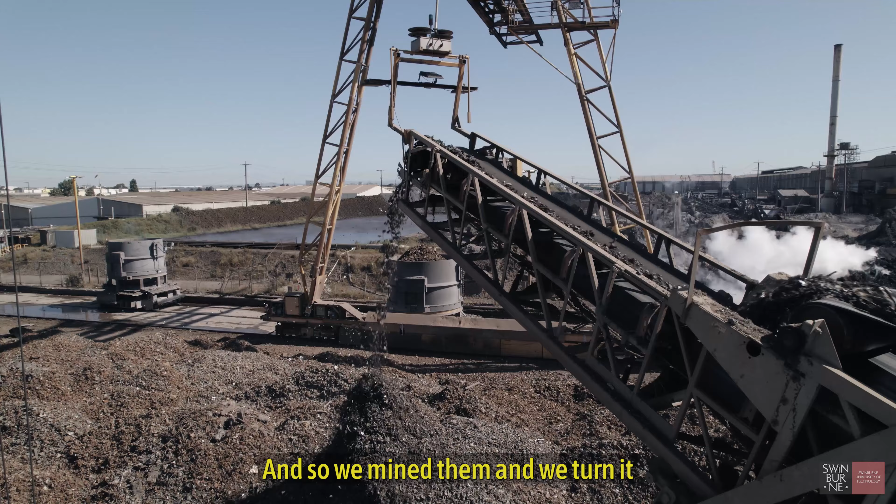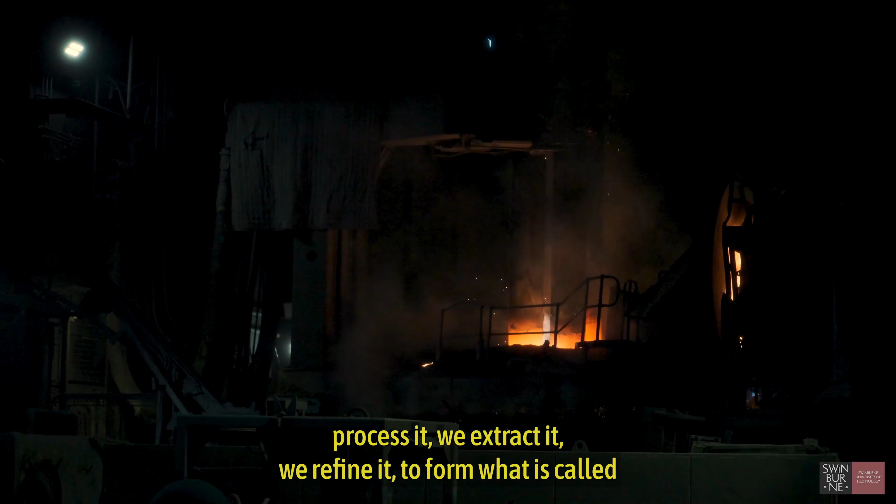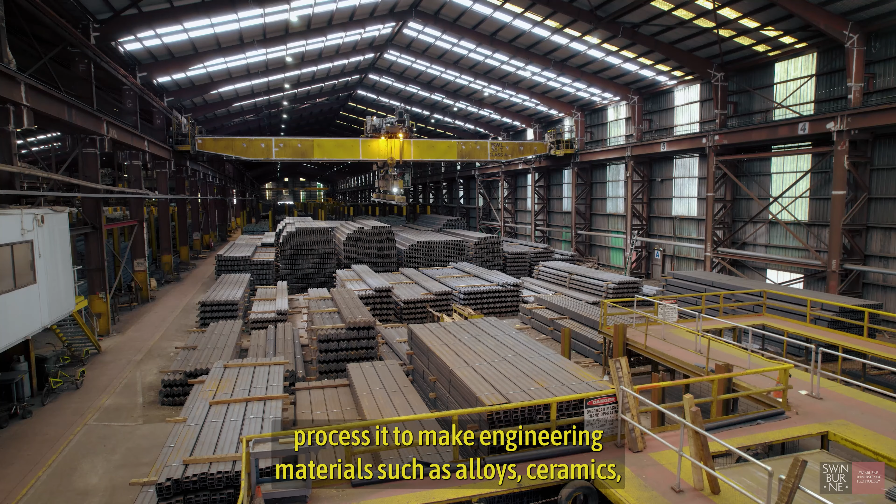So when we talk about green metal processing and recycling, ultimately we use our resources from Earth. So we start with something from underground, we mine them and turn it into what is called raw materials, such as ores, sand, rocks, wood, plants, and then we further process it, extract it, refine it to form what is called basic materials, such as metals, chemicals, paper, cement, and fibers. We further process it to make engineering materials such as alloys, ceramics, plastics, concrete, and so on. And then we also further process it to make into products, and then we use that product.

And of course, we use the products, and then at the end of the useful life of the product, we usually turn it back into the underground. So we landfill them or we burn them, right? So this is called the material cycle.

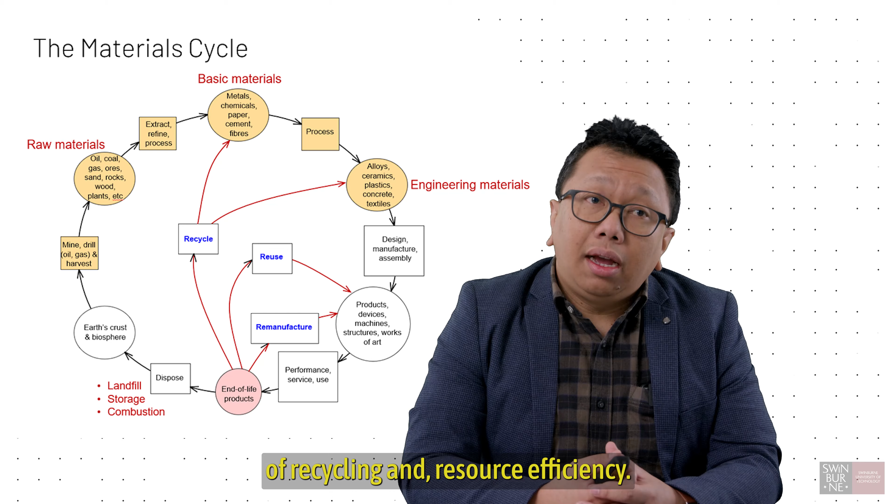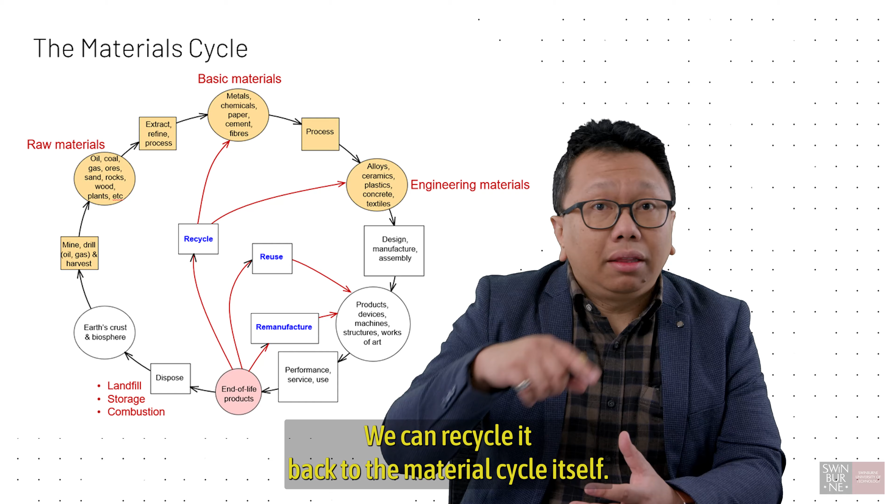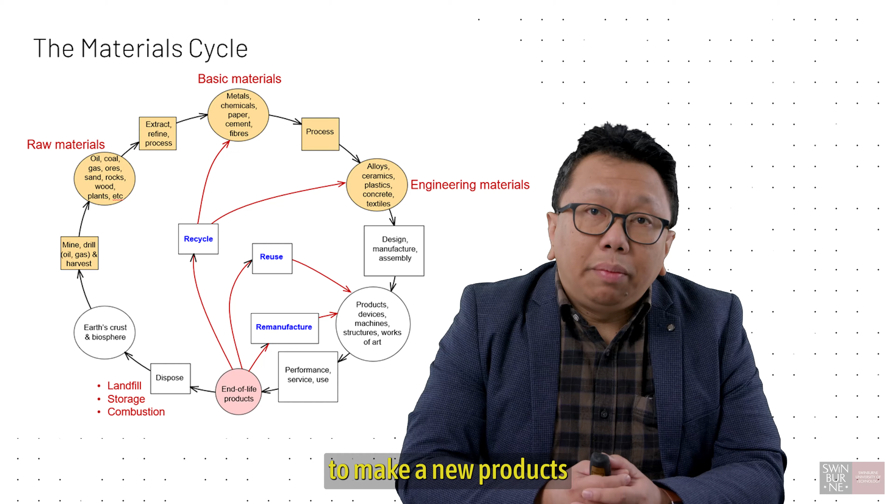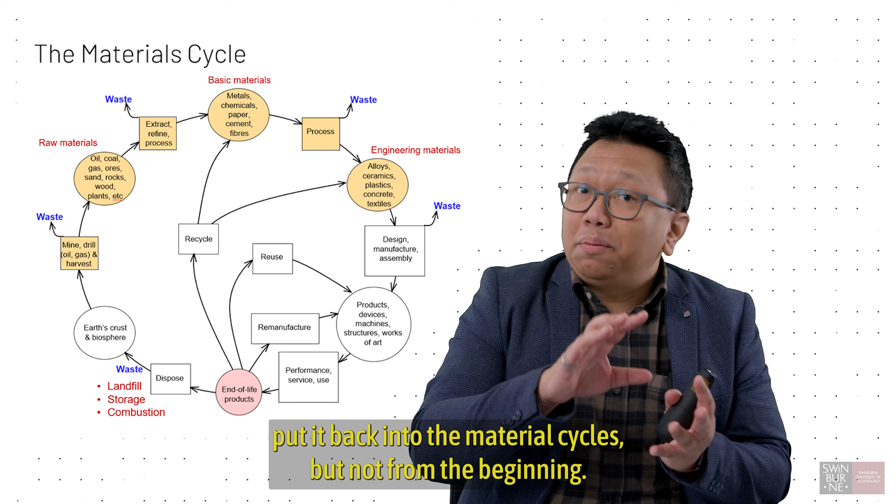In the context of recycling and resource efficiency, instead of putting things back underground, we actually try to reuse this and utilize this in a number of ways. We can recycle it back to the material cycle itself, for example, to make basic materials again. We can reuse it, part of the product, to make new products and also do remanufacturing of new product. So we turn these materials and put it back into the material cycles, but not from the beginning. For example, we use end-of-life products and take the metals, and then we recover the valuable metals from it.

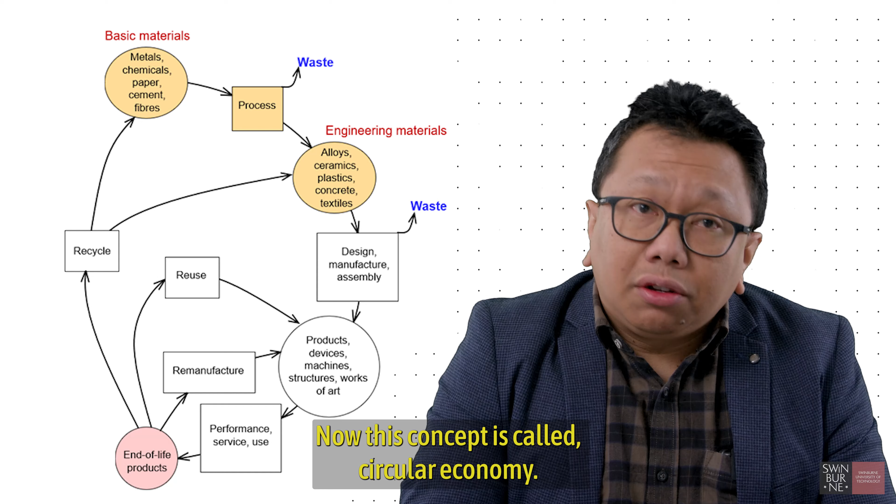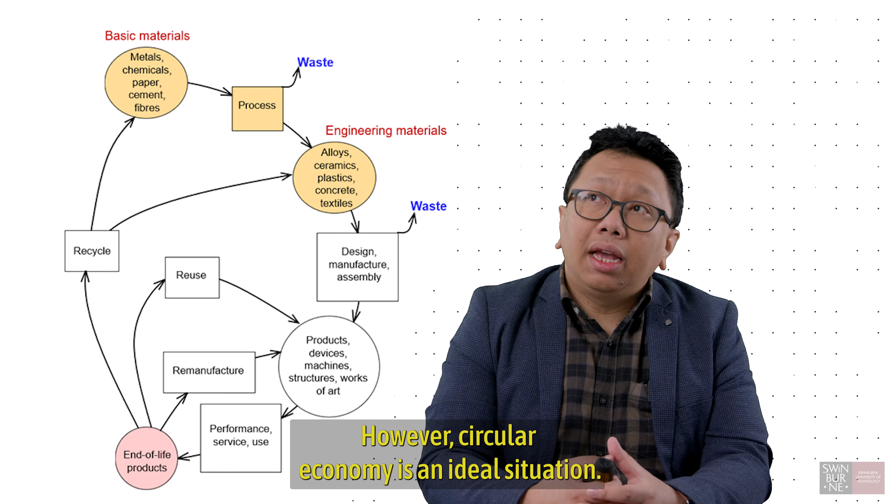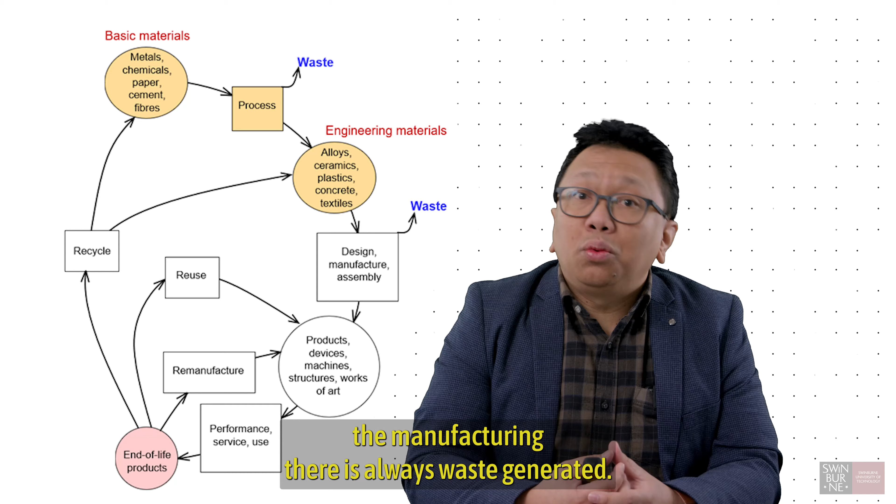Now, this concept is called circular economy. It is an economic system that aims at eliminating waste and the continual use of resources. However, circular economy is an ideal situation. It is an aspiration, right? We cannot really achieve 100% circular economy because actually, in every process, including recycling, remanufacturing, there's always waste generated. And from the thermodynamic perspective, there's a limit where we cannot reuse these materials anymore.

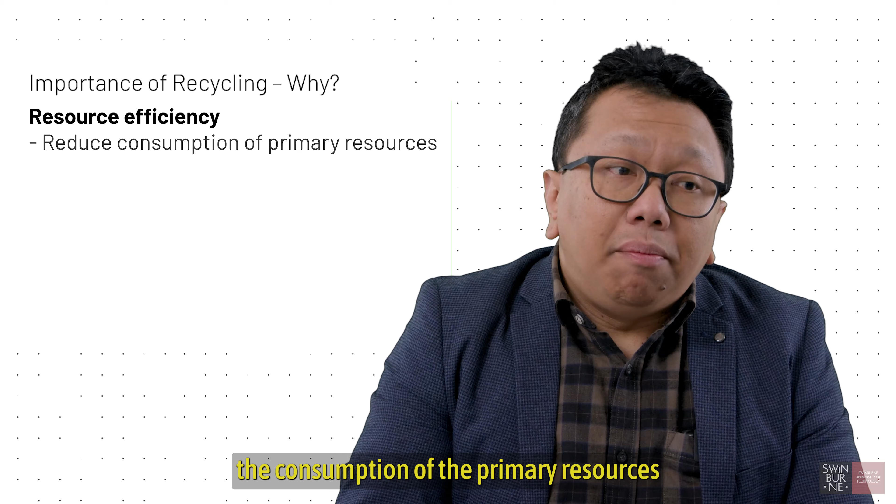So in the context of what we're talking about, it is clear that recycling is vital. So now let's talk about that in more detail. Why actually is recycling important? First of all, it actually reduces the consumption of the primary resources and also reduces the waste associated with processing these primary resources. Usually primary resources are quite complex, and also have quite a long process route. So if we reduce that, we also reduce the waste associated with the processing of them.

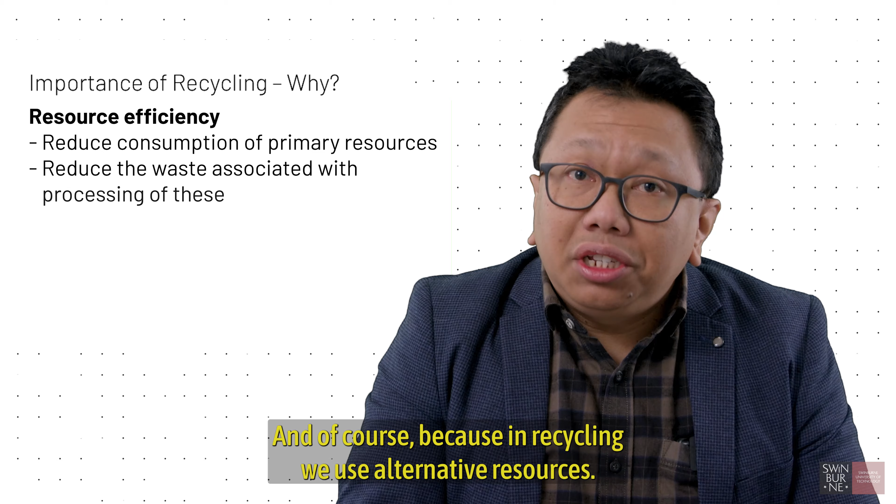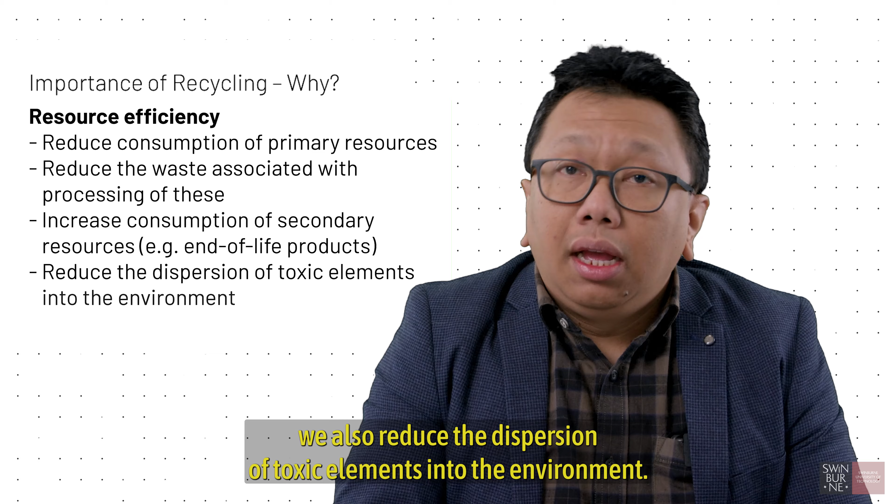And of course, because in recycling we use alternative resources, it means that we increase the consumption of secondary resources such as end-of-life products, byproduct from industries, and other waste from our daily life. In doing more recycling, we also reduce the dispersion of toxic elements into the environment, and of course, we also reduce the space for landfilling as well.

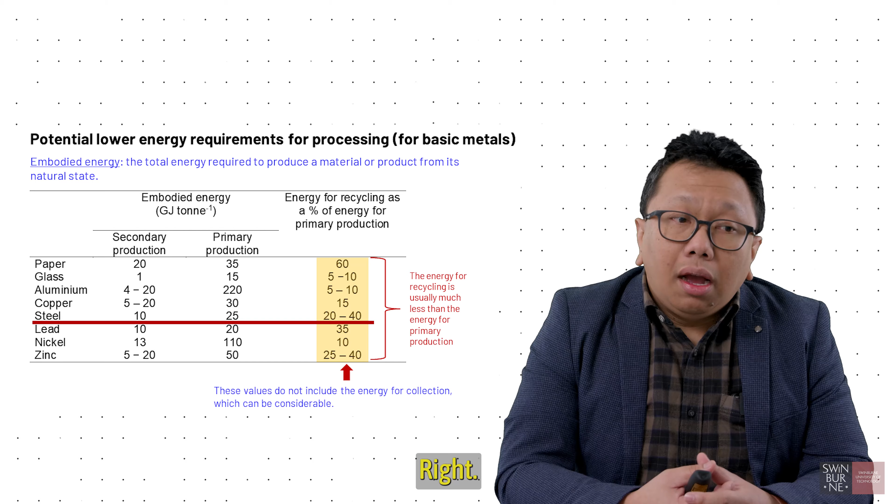And if we look at this one here, let's look at steel. If you want to produce steel, the energy required to make steel per ton of steel is about 25 gigajoules per ton if we use primary resources. However, if we use secondary resources, if we recycle steel, we only need about 10 gigajoules per ton. So that is actually a reduction of energy to 20 to 40%. And the same thing for other metals as well, such as aluminum. We can actually reduce the energy requirement to 5 to 10% if we use secondary resources.

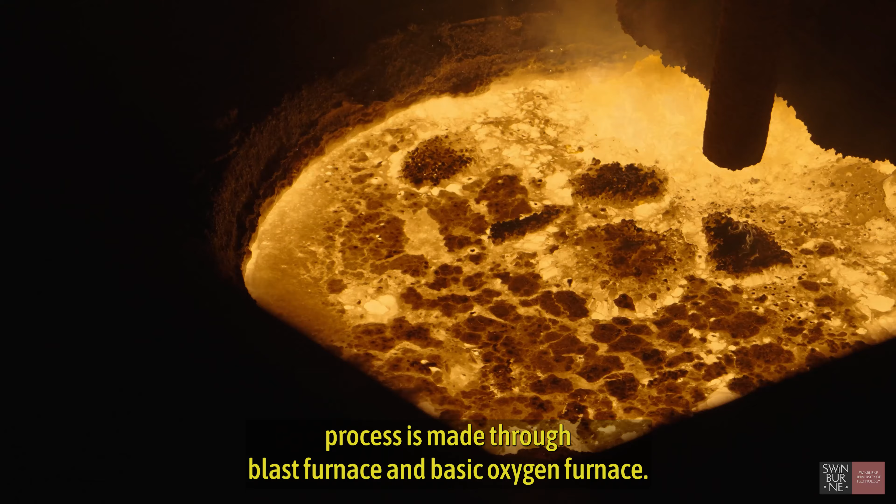Steel contributes to more than 7% of greenhouse emissions. So now in Australia, around 75% of steel processing is made through blast furnace and basic oxygen furnace. Then it's only 25% from EAF, and we know that using EAF is based on scrap. So which means that we need to know how much scrap we have in Australia, and also the quality of the scrap in Australia.

So InfraBuild is an electric arc furnace based steelmaker. We have two electric arc furnaces, one in Laverton in Melbourne and one in Rooty Hill in Sydney. They use steel or scrap steel as the ferrous source, as the source of steel that goes into it.

So we're very different from a blast furnace manufacturer, and because of that we naturally have an advantage because we're a lower emissions emitting process in terms of steel making.

We very much understand that there are 3 major energy inputs that contribute to our emissions. The main one is the electricity we use to make the steel that comes out of the electric arc furnace process. The second is our use of natural gas, and the third is our use of coke, which comes from coal dug out of the ground.

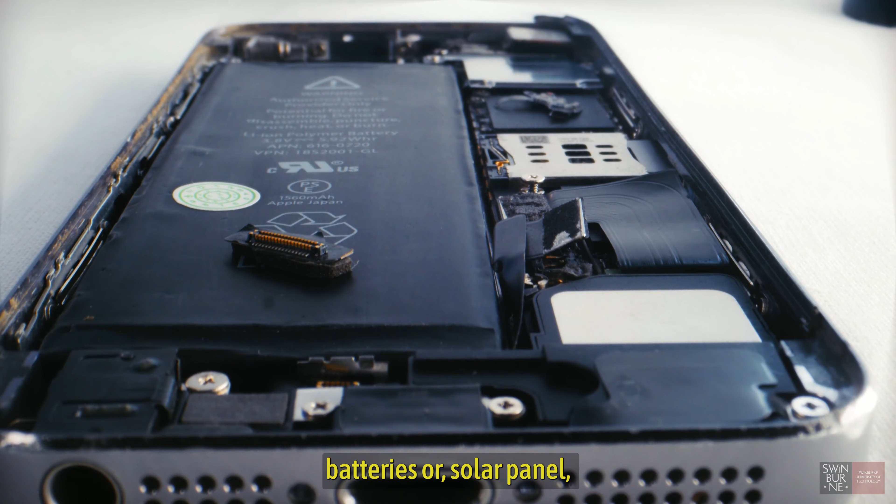The other reason why recycling is important, as I mentioned earlier, is that these secondary resources have some value, right? Some contain valuable metals. For example, mobile phones, batteries, solar panels, or end-of-life magnets. We generally call this e-waste. It actually contains a lot of valuable metals, and the concentration of valuable metals there is actually higher compared to the concentration from primary ores.

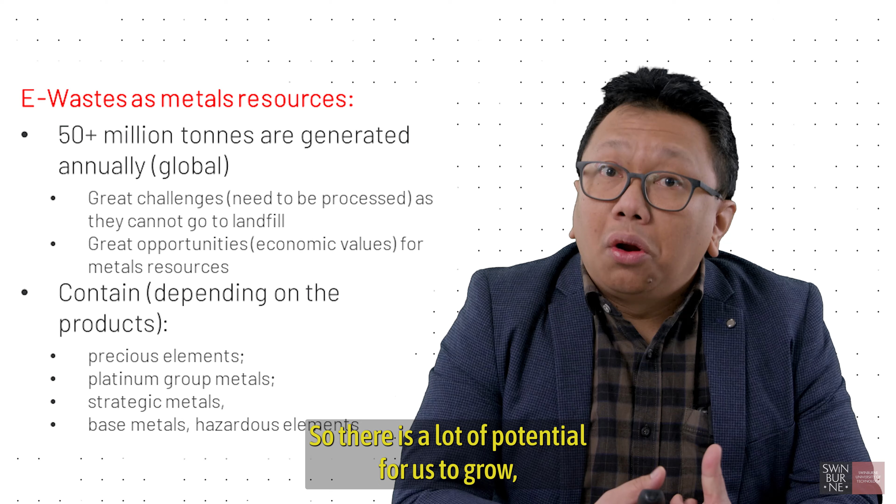So it only makes sense for us to also utilize these resources and do more recycling. When we're talking about e-waste, it is actually an opportunity, but also a challenge. Globally we generate about 50 million tons of e-waste every year, and only about 30% is actually recovered or processed. So there's a lot of potential for us to grow and recycle these materials and get the value from this.

Just to illustrate, if we're talking about a gold ring on my finger, it contains about 2 grams of gold. These 2 grams of gold can actually be obtained from about 15 kilograms of mobile phone waste. But if you look at the primary source, the gold ore itself has a low concentration of gold. The same amount of gold, usually we can only get from about 500 kilograms to 1 ton of primary ores.

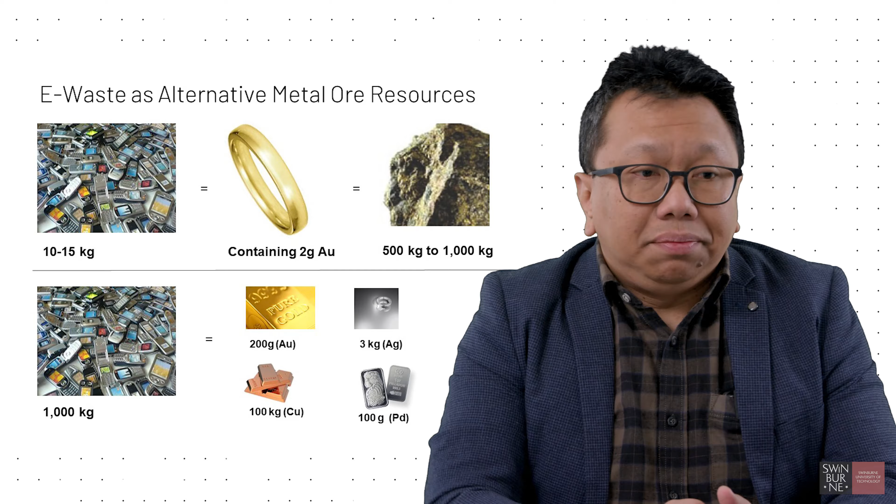So again, it is showing the high value and high concentration of these selected valuable metals in secondary resources. Another illustration: if we talk about mobile phones, looking at the share of weight in the components and elements, we'll find that 56% of a mobile phone consists of plastics. And there's only a total of a few thousand ppm of gold, silver, palladium, and other exotic metals.

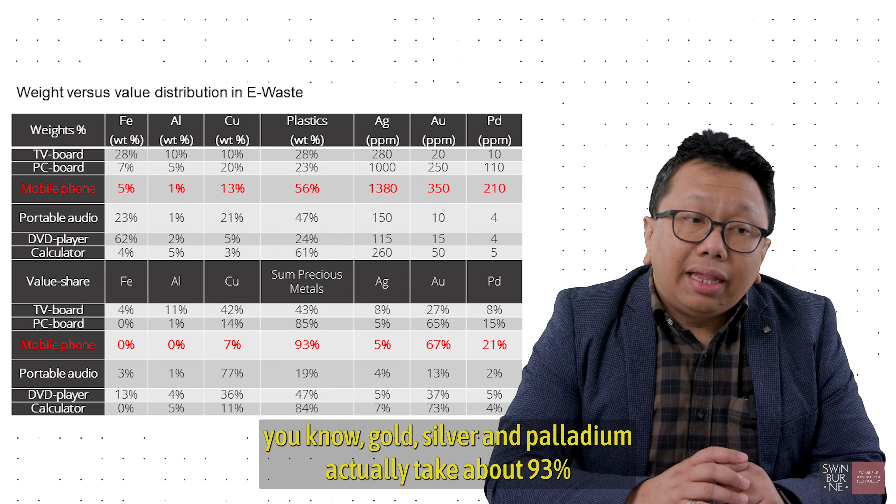But if we look at the value, those gold, silver, and palladium actually take about 93% of the value share of metals in that mobile phone.

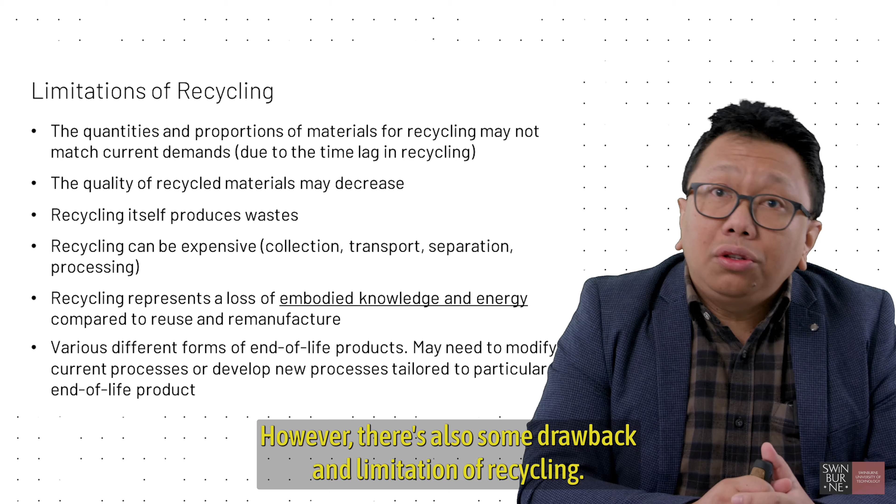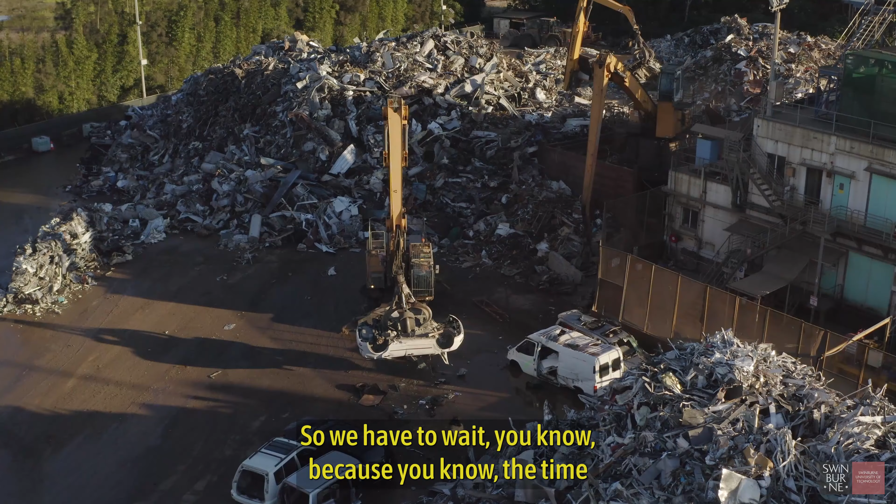So we talk about a lot of good things about recycling. However, there's also some drawbacks and limitations of recycling. For example, the quantities and proportion of materials for recycling may not match the current demand, so we have to wait, because the timing doesn't match with the production of the resources itself and the production of new metals. The quality of recycled materials may also decrease — that's another limitation.

Recycling itself produces waste. This comes back to my earlier comment regarding circular economy — we cannot really achieve 100% circular economy.

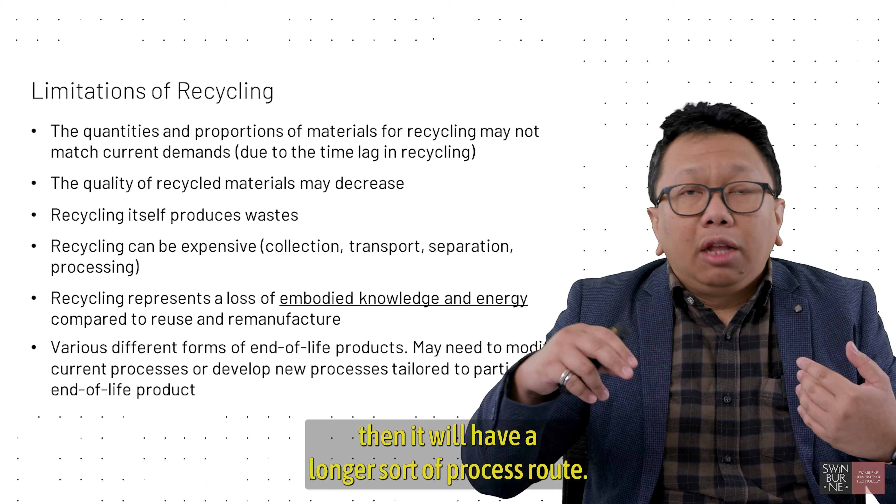Depending on the products or materials, recycling can be expensive because first we have to collect them and then transport them to their location. The actual processing route can also be longer — for example, if you want to extract all of the valuable metals, it will require a longer process route. Another limitation is that when we talk about secondary resources and end-of-life products, there are many of them with different compositions — they're quite complex, and processing them requires different processes. So one of the challenges is to have a process that is flexible and robust enough to process different types of end-of-life products.

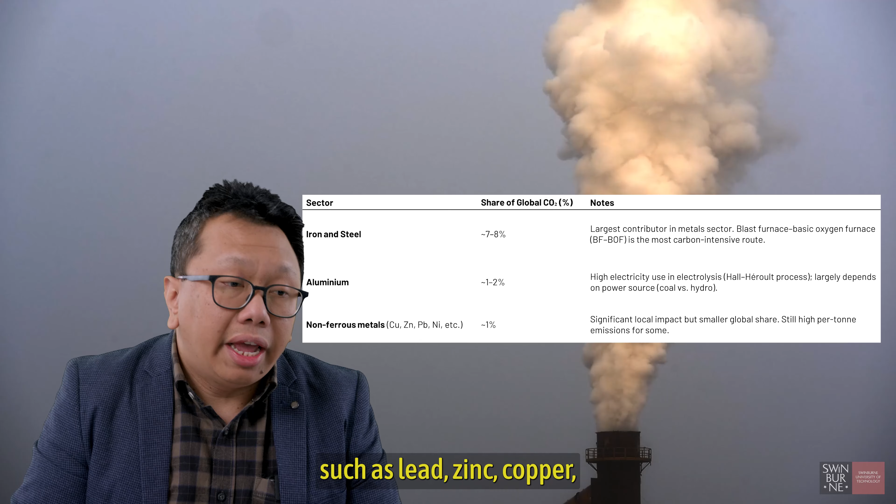There are a number of challenges in current metal production and recycling processes, but one of the greatest is the CO2 emission from these processes. For example, in iron and steel production, the global CO2 emission from this sector is about 7 to 8%. In aluminum production, it's 1 to 2%. And other metal production, such as lead, zinc, and copper, contributes about 1% of CO2 emission. That is why it is important to optimize and develop new processes to reduce this CO2 emission.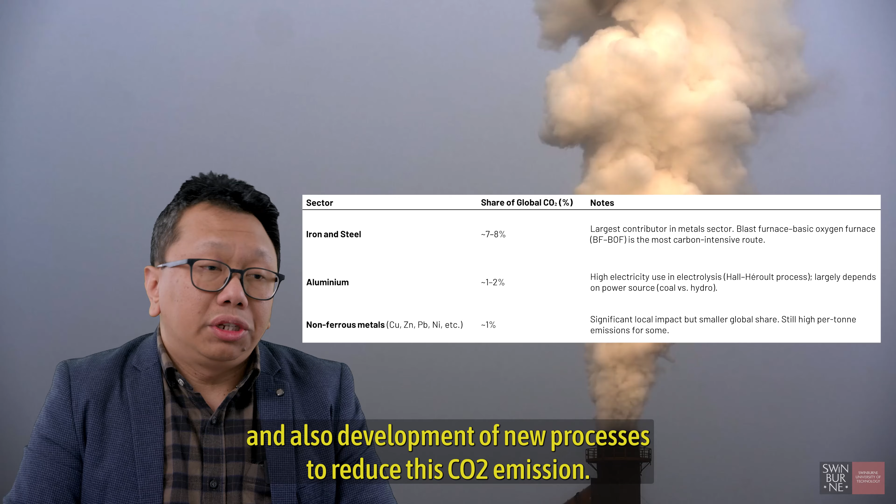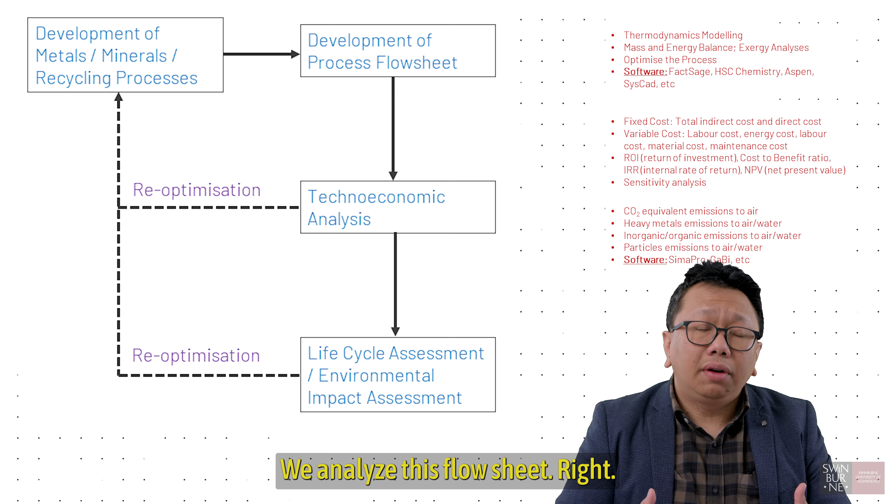When we are developing new metals processing and recycling, we need to do it right. So we usually start with developing the process in the form of a flow sheet. We analyze this flow sheet using thermodynamic knowledge, and the next step after that is looking at the techno-economics of the process.

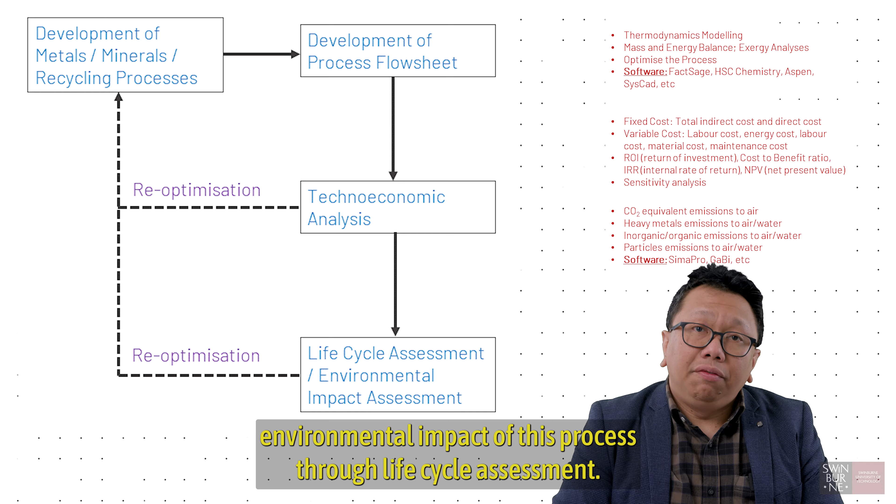After that, we're also looking at the environmental impact of this process through life cycle assessment, so that we have quite an optimum process route. And this is actually an iterative process.

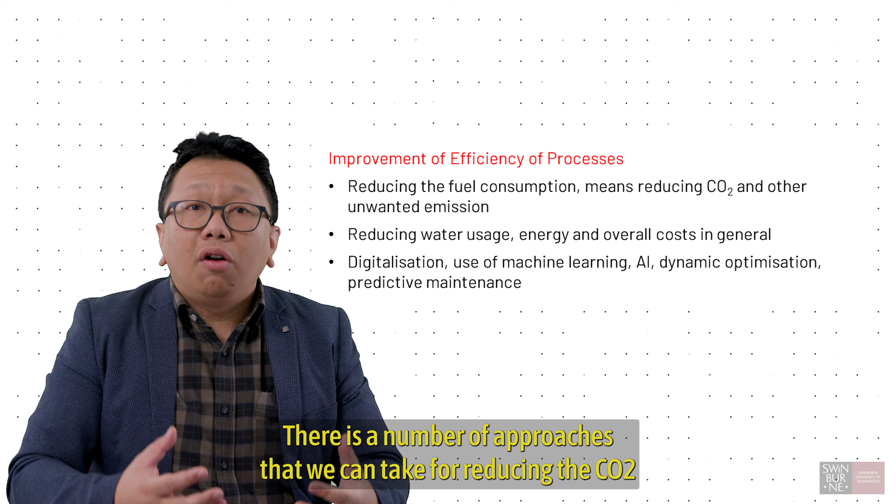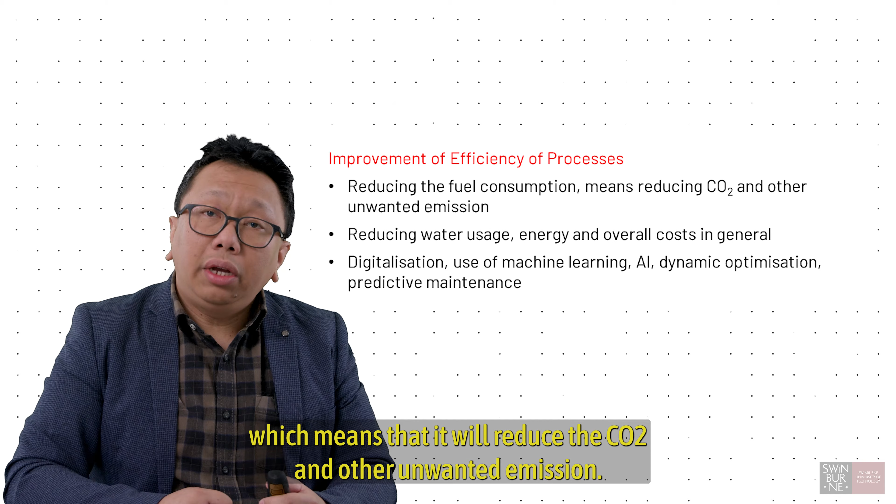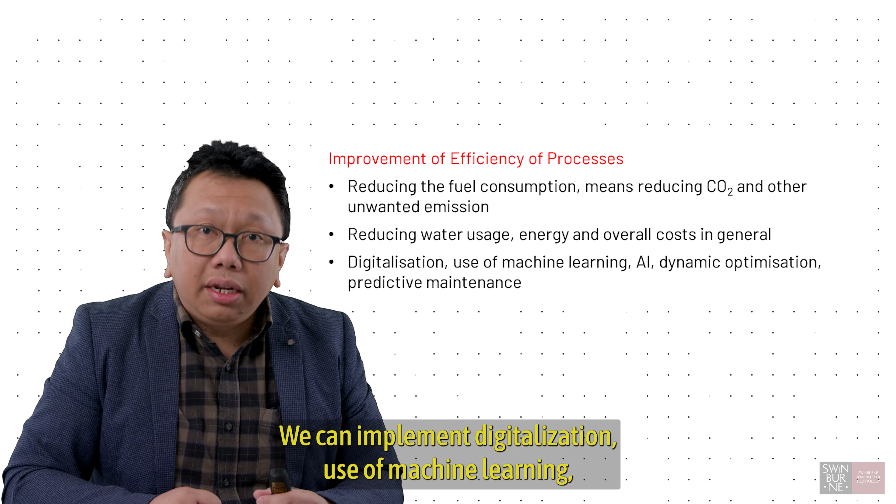There are a number of approaches we can take for reducing CO2 emission and decarbonizing current and new metals recycling processes. One thing we can do is improve the efficiency of the process. For example, we can reduce fuel consumption, which reduces CO2 and other unwanted emissions. We can reduce water usage, energy, and overall costs. We can implement digitalisation, use of machine learning and AI, to optimize the process.

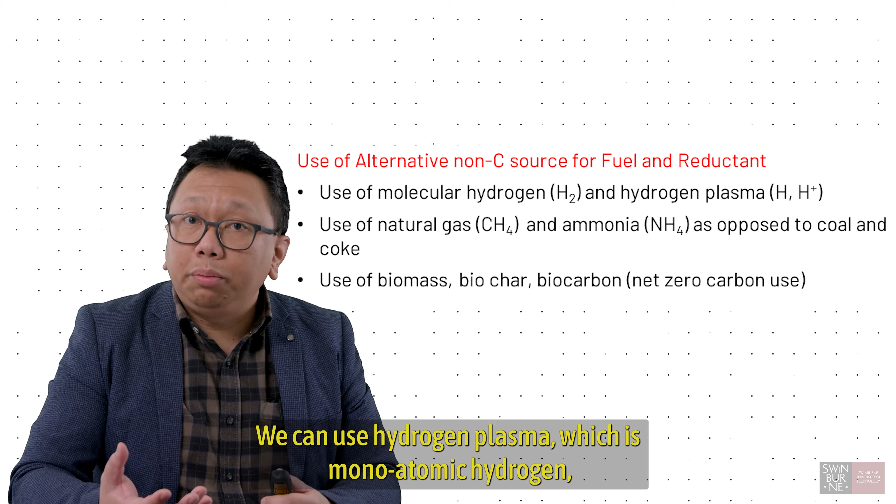The second thing we can do is use alternative non-carbon sources for fuel and reductant. We can use molecular hydrogen. We can use hydrogen plasma, which is monoatomic hydrogen and also ionic hydrogen. We can use natural gas or ammonia. We can also use biomass, biochar, and biocarbon.

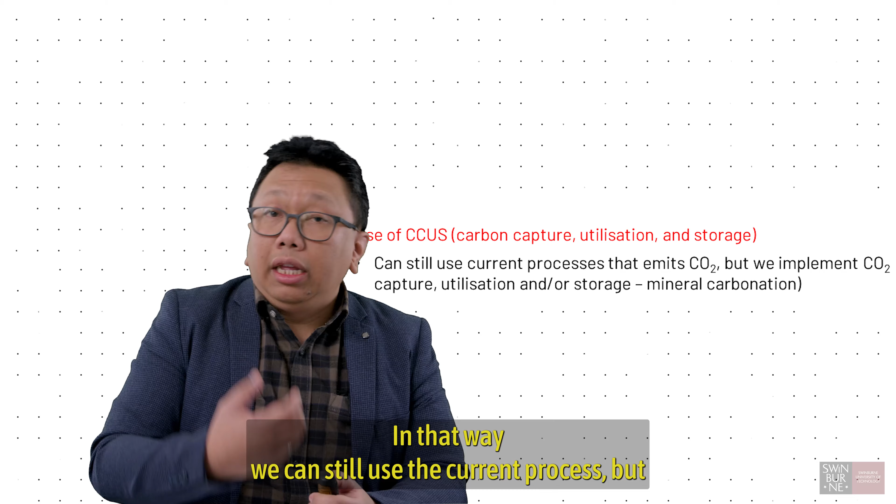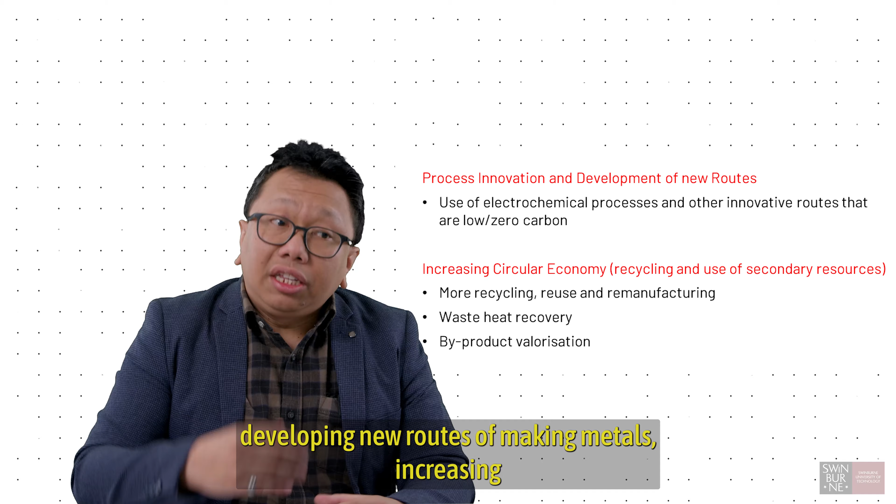Another way to decarbonize is to use what is called CCUS, carbon capture, utilization, and storage. In that way, we can still use the current process, but we sequester the CO2. We can also emphasize process innovation, developing new routes of making metals, and increasing circular economy, which means increasing recycling. All of this will contribute to the decarbonization of metallurgical industries.

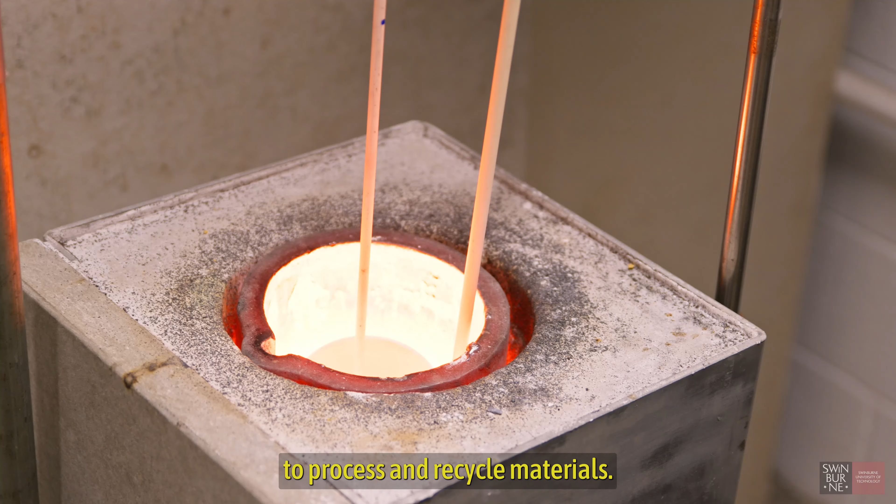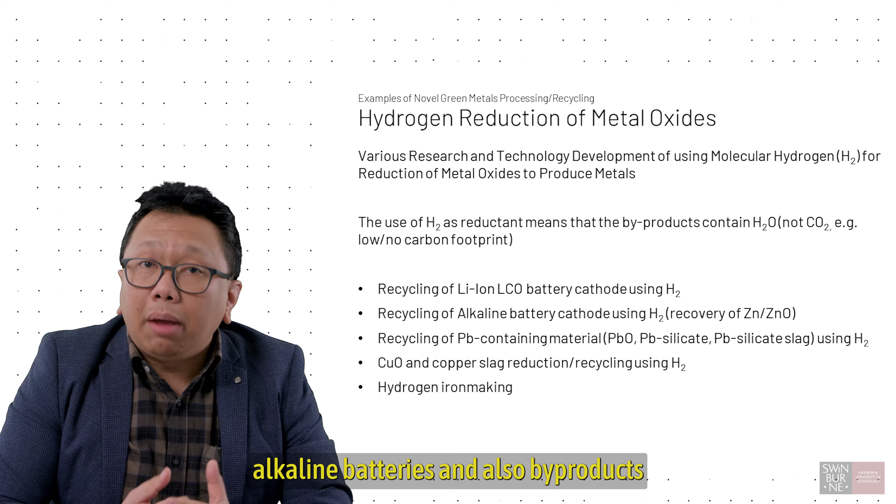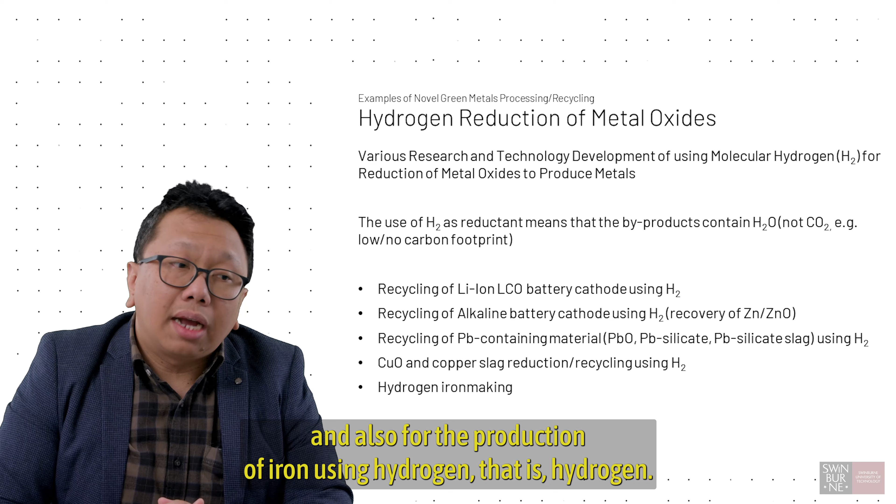There are a number of novel green metals processing and recycling methods. In Swinburne, we are working on a number of these. For example, we are using hydrogen, molecular hydrogen, to process and recycle materials. We use it for recycling of lithium-ion batteries, recycling alkaline batteries, and byproducts of industrial processes, such as slags from lead production and copper production, and also for the production of iron using hydrogen, that is hydrogen iron making.

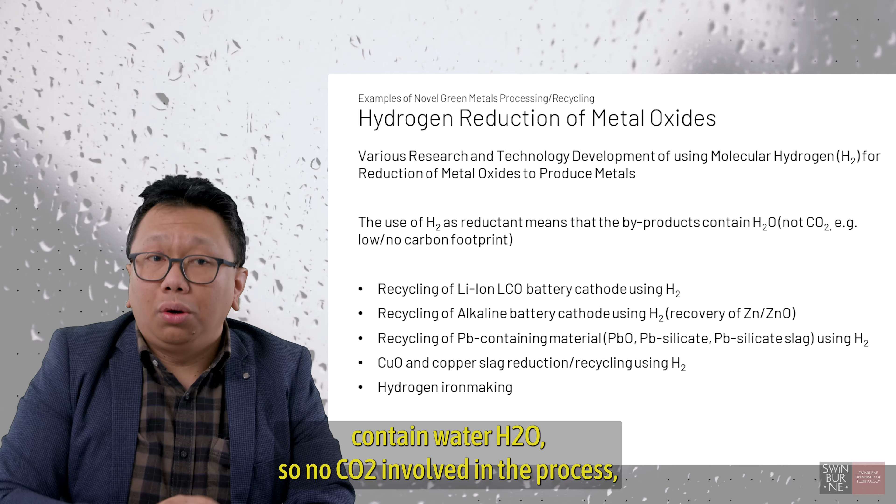The use of hydrogen means that the byproducts from the process contain water, H2O, so no CO2 is involved in the process, which means you will have low or no carbon footprint on these processes.

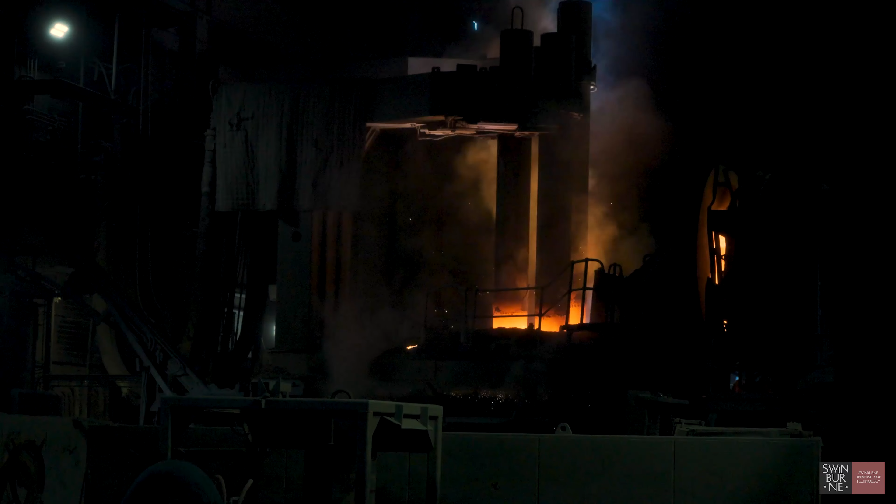One of the things we are developing at the moment is to use hydrogen plasma for processing of metals. Hydrogen plasma is an ionized form of hydrogen, such as monoatomic hydrogen and ionic hydrogen, H+. Why is this useful? Because it has quite a strong thermodynamic potential. It can actually be used to reduce stable oxides, such as alumina, calcia, titania, and also rare earth oxides.

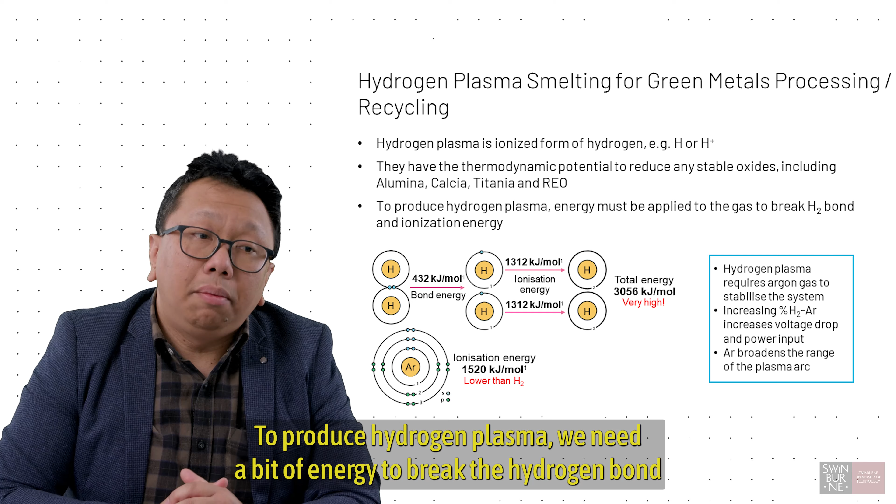To produce hydrogen plasma, we need a bit of energy to break the hydrogen bond so they can be used for the reduction. In Swinburne, we are developing what is called the Swin H2 Plus plasma reactor. It is a novel hydrogen plasma reactor where we use a plasma torch of 35 kilowatt power, combined with a 3D printed copper shroud and reactor tube. This can be used for processing materials with a flow rate of 50 grams per minute.

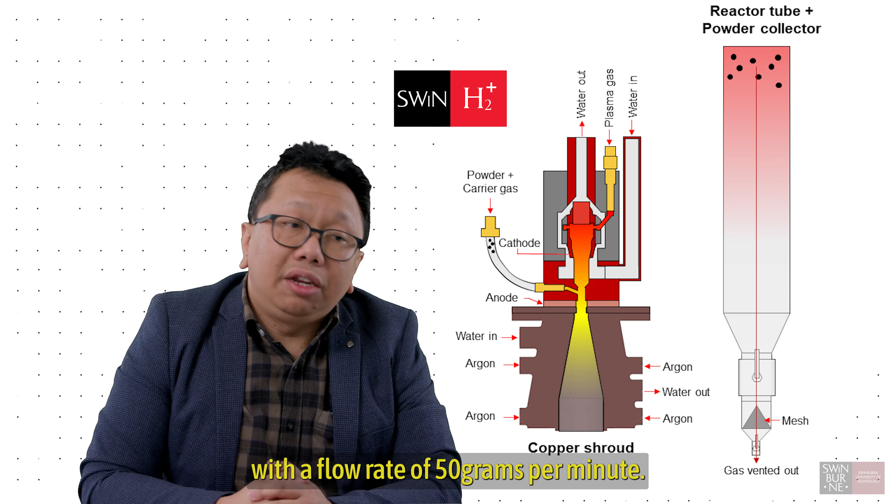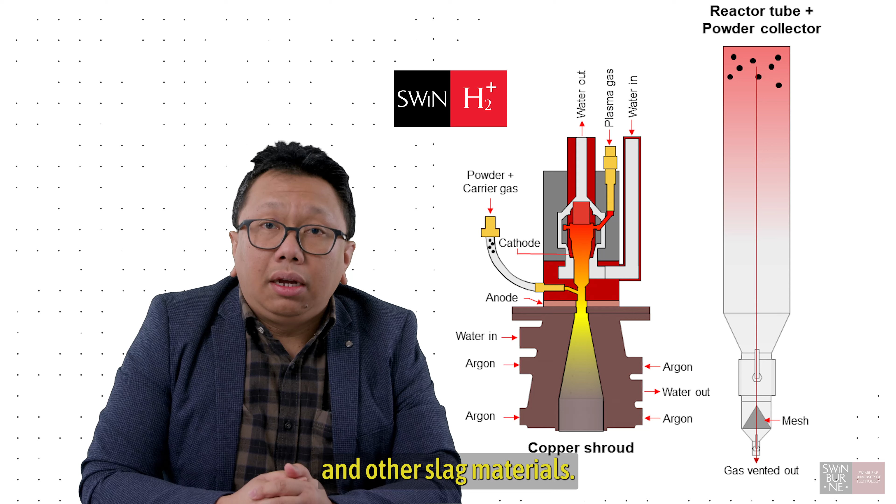We have demonstrated this for production of iron from iron ore and also processing of silica and other slag materials. This shows the product of the process, where you can see it contains 100% iron reduced from the initial ore.

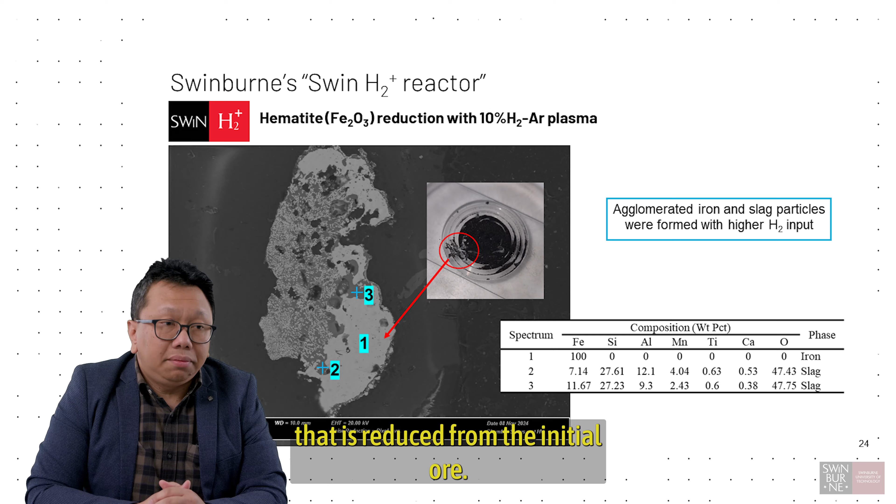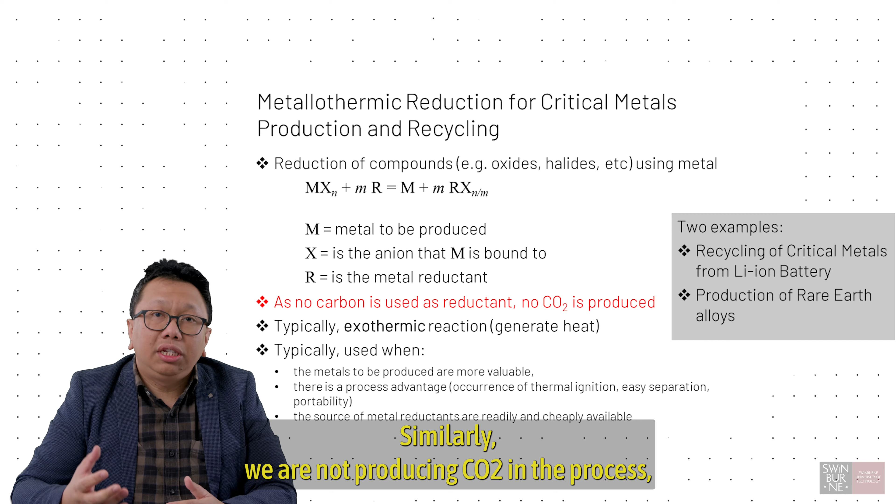The other process we are developing in Swinburne is through metallothermic reduction. In this case, we are using metals as a reductant instead of carbon. Similarly, we are not producing CO2 in the process, hence low carbon or no carbon processes.

My specialty is in battery recycling. Right now I'm focusing on lithium-ion battery recycling, trying to take out valuable metals from this waste.

Battery recycling has a lot of important aspects. The first is that we want to reduce the growing accumulation of end-of-life batteries, coming out from electric vehicles, phones, laptops, tablets, and so on. Secondly, by doing recycling, it enables us to recover critical materials, which are really essential for national supply chains and technological advancement.

So we're in the high temperature laboratory, and this is a horizontal tube furnace, one of the high temperature furnaces we use to process our end-of-life batteries.

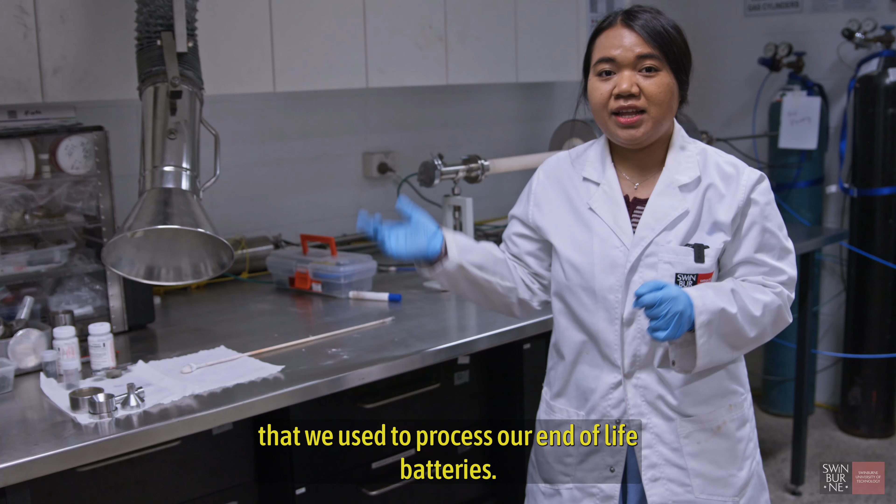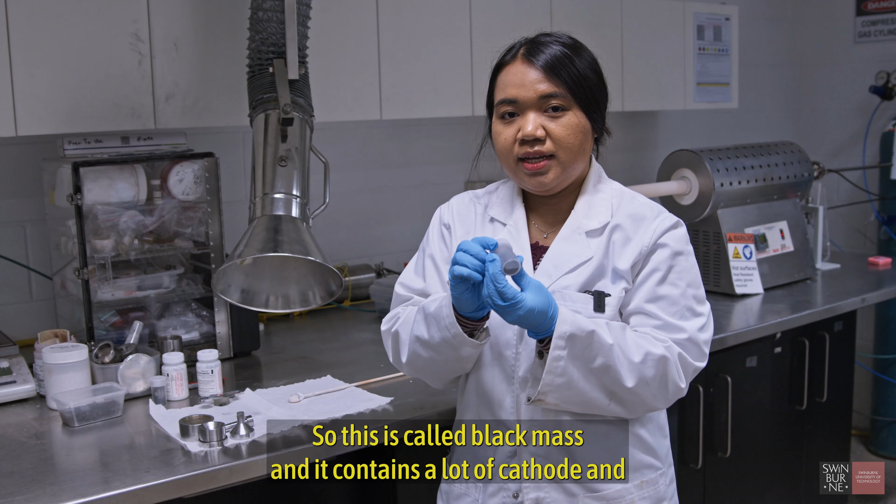So these are the samples, coming from spent batteries that have been processed, such as dismantling, grinding, crushing, and a lot of washing, chemically washed. This is called black mass, and it contains a lot of cathode and anode materials, and also a lot of critical materials.

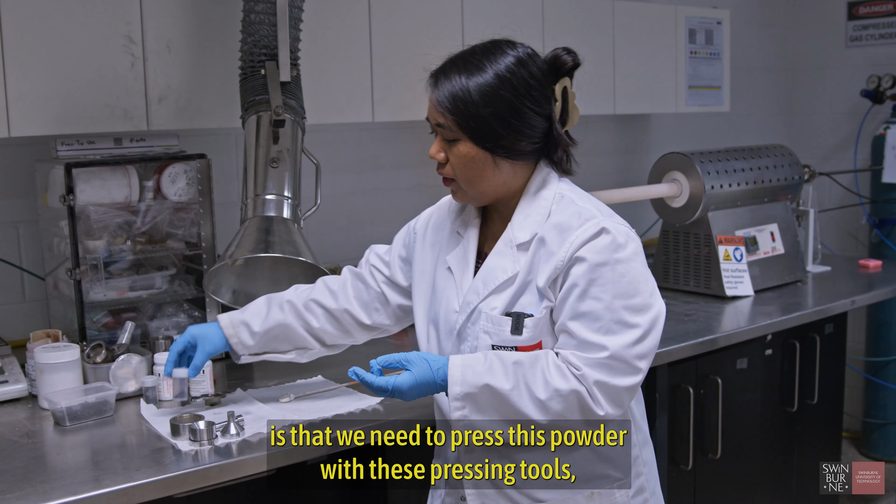So what we need to prepare before we put it in the furnace is to press this powder with these pressing tools, and it will come out as black mass pellets.

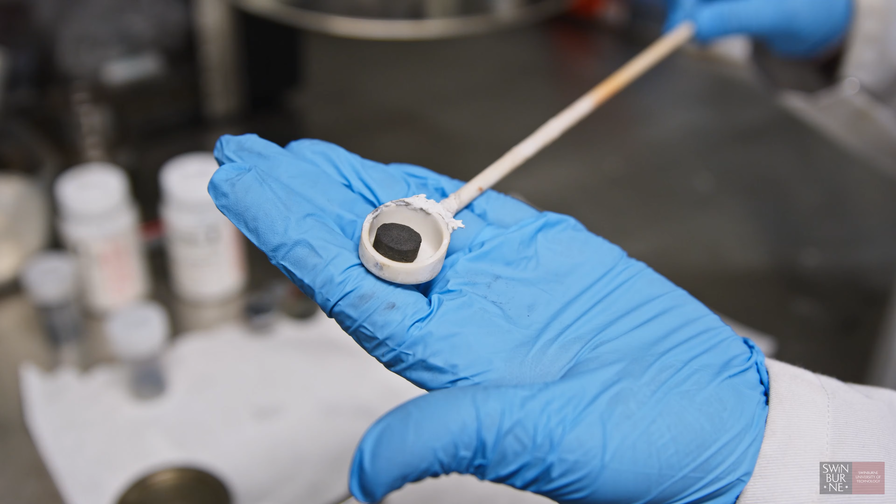So we then insert these pellets into a sample holder and put it in the high temperature furnace. I'm going to explain a little bit of the components of the furnace.

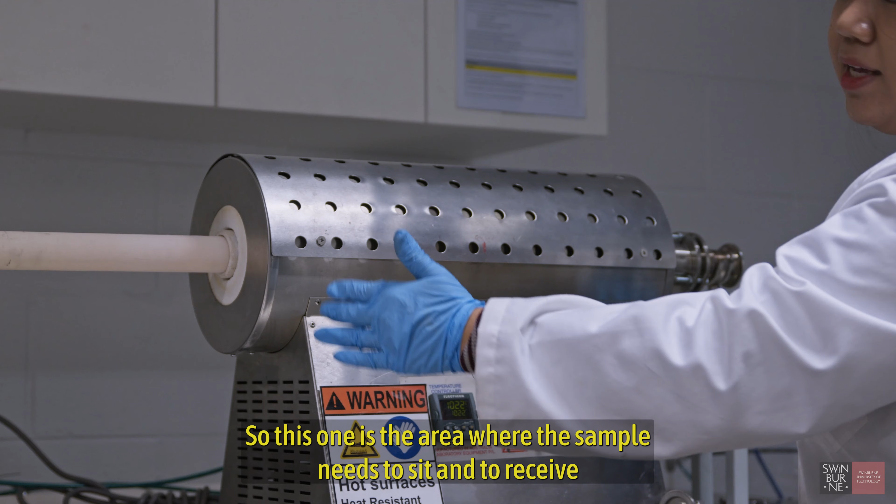In the middle zone here, we have heating elements. This zone is the area where the sample needs to sit and to receive the maximum of heat. This cylindrical tube is made of alumina, and this part on the both ends are called flanges.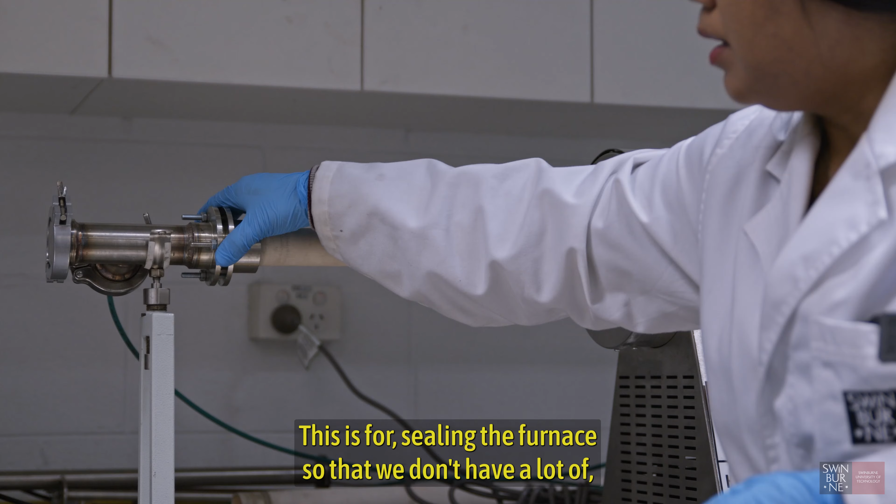This is for sealing the furnace so that we don't have a lot of oxygen coming in from the air, so that our environment for the sample is protected.

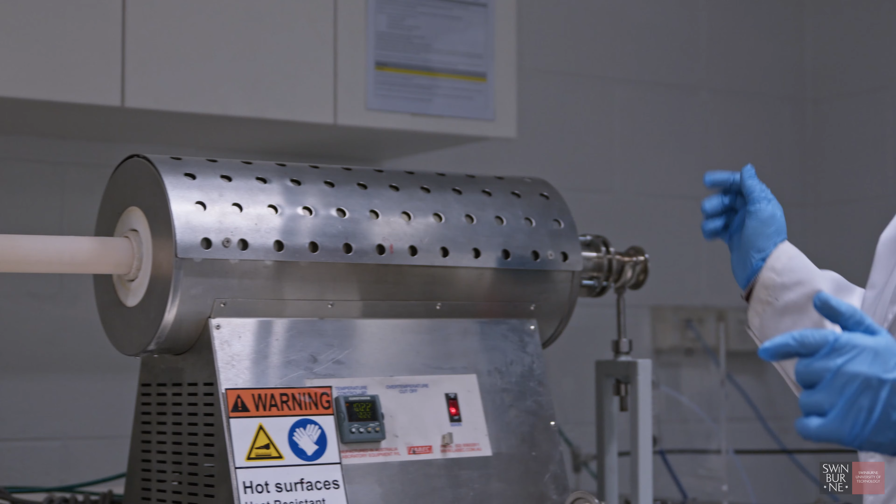And in the other end of the furnace is where we insert the sample. We also call these flanges. And in these flanges, we have a lot of inlets, can be 2 or 3 inlets.

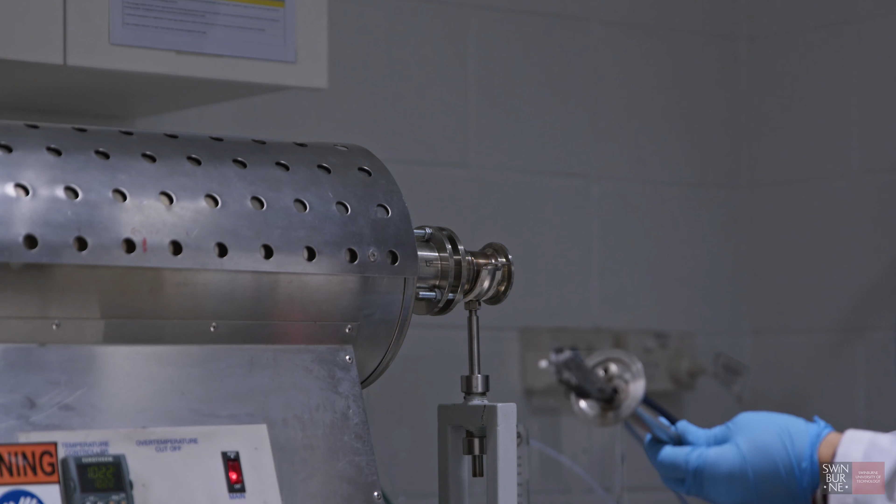One is for the gas. In this case, we use argon or nitrogen for the inert gas. So this gas is not reactive, so it just keeps the sample really protected.

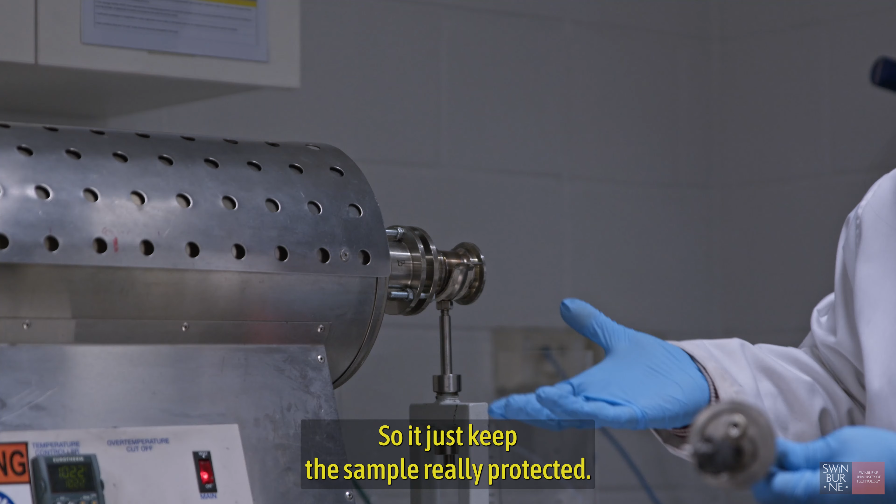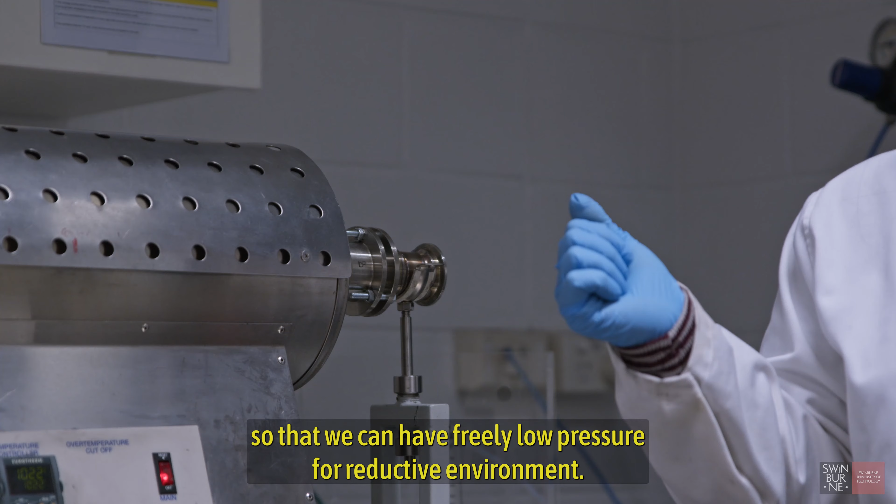And the other inlet can be for the vacuum purposes. So we insert another hose connected to a pump so that we can have really low pressure for a reductive environment.

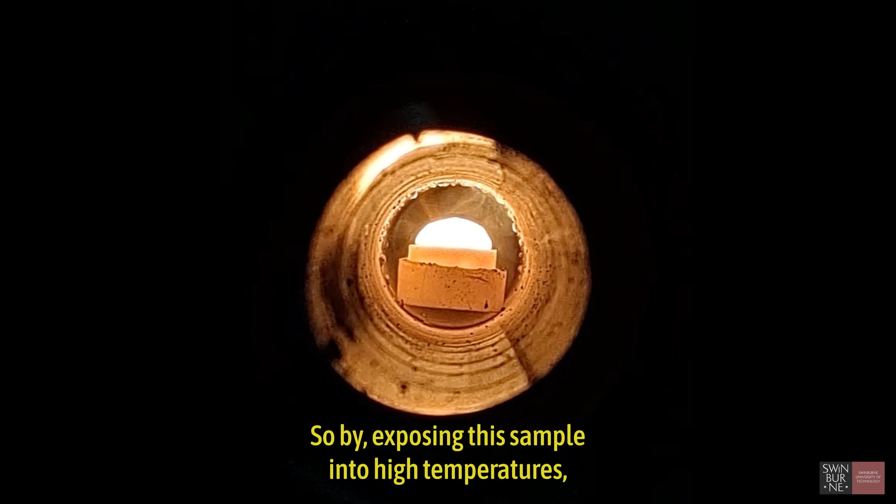So the purpose of inserting this sample into the furnace is that we want to separate the lithium from the cobalt, because lithium and cobalt are the critical materials. So by exposing this sample into high temperatures, we want to take out the oxygen by the help of a reducing agent, aluminum. So aluminum will take out the oxygen and make alumina, so that it will leave out the lithium and cobalt, and we can separate those two metals from oxygen.

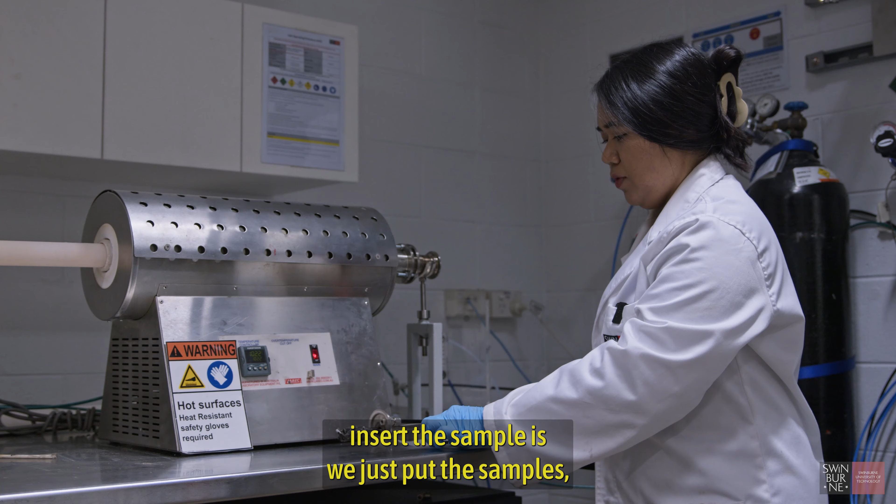So the way we insert the sample is we just put the samples sitting on top of the boat, and then we can just insert it from this end of the flanges.

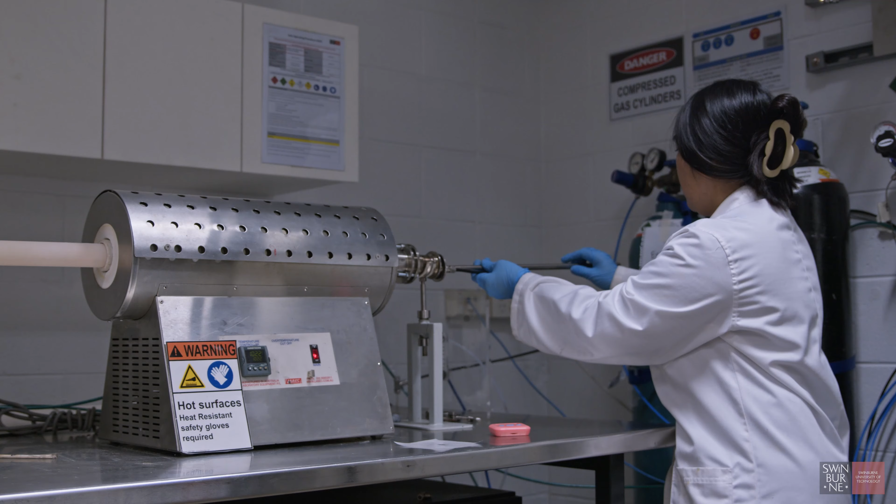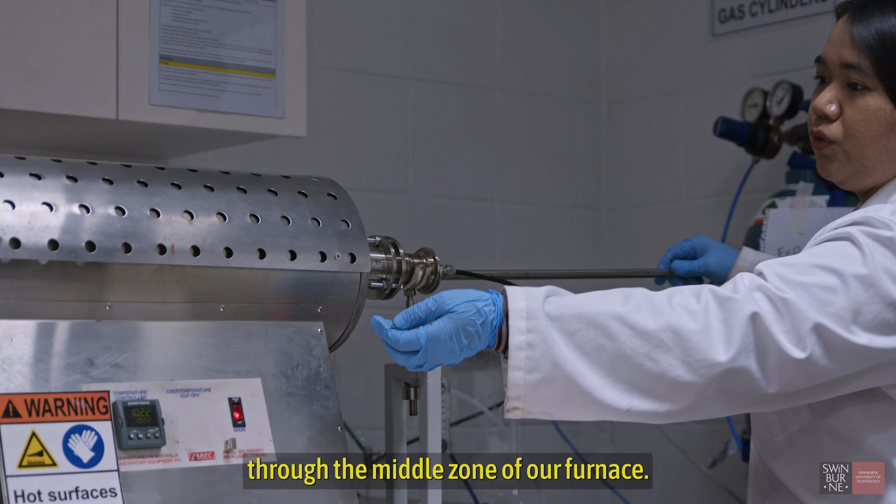And there is a mechanism here made of magnet, which is connected to our sample holder. So when we slide it in, our sample is just going to slide through the middle zone of our furnace. And we wait for a certain period of time for holding time.

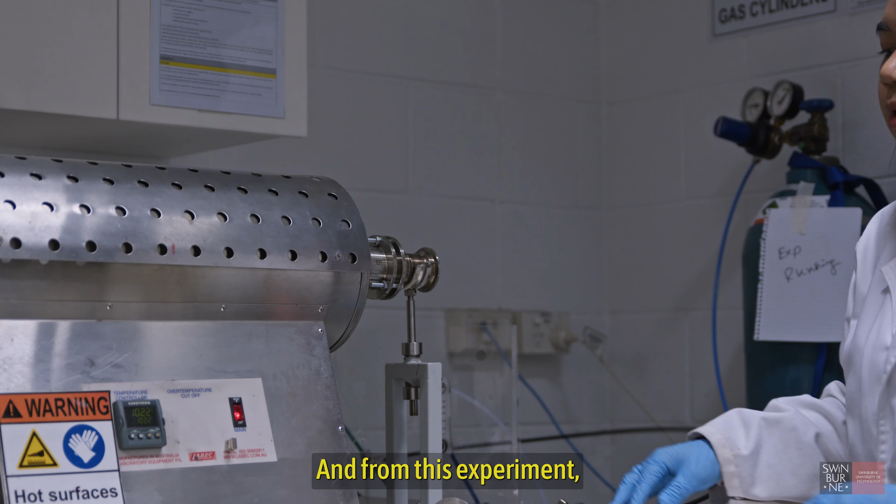And from this experiment, we take out the samples and we prepare the sample to be looked at with characterization tools such as SEM, EDX, and XRD.

This process typically generates heat. It's an exothermic process, and then we can use this heat as part of the process. So in terms of energy requirement, it also reduces the energy requirement.

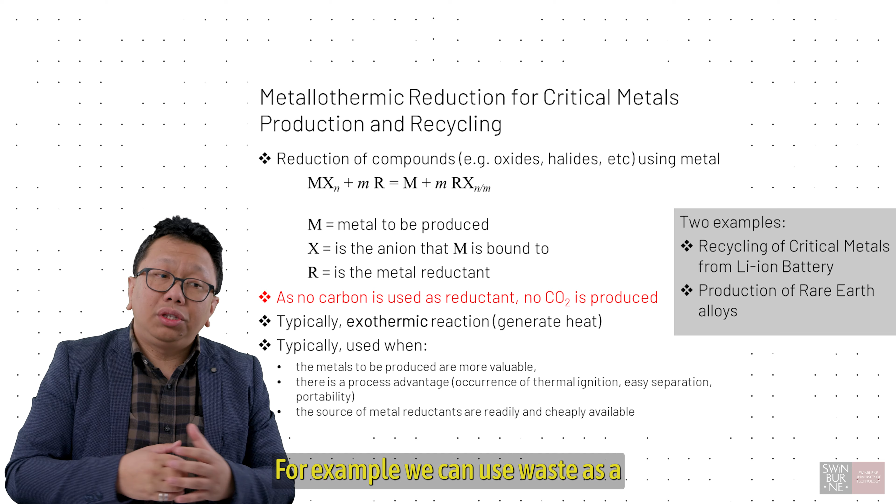So we usually use metallothermic reduction if the metals to be produced are more valuable, or the source of metal reductants are readily available. For example, we can use waste as a source of metal reductant.

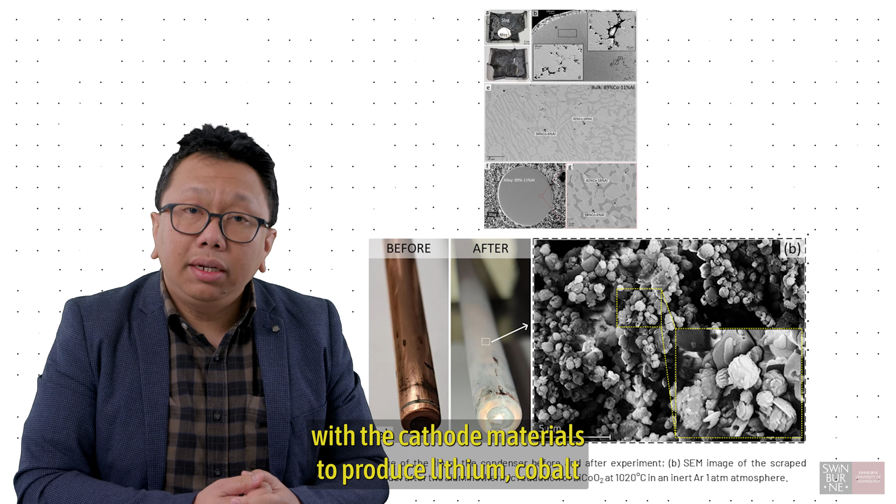So in the recycling of lithium-ion batteries, we are using aluminum and react aluminum with the cathode materials to produce lithium, cobalt, and other metals in the battery, end-of-life batteries.

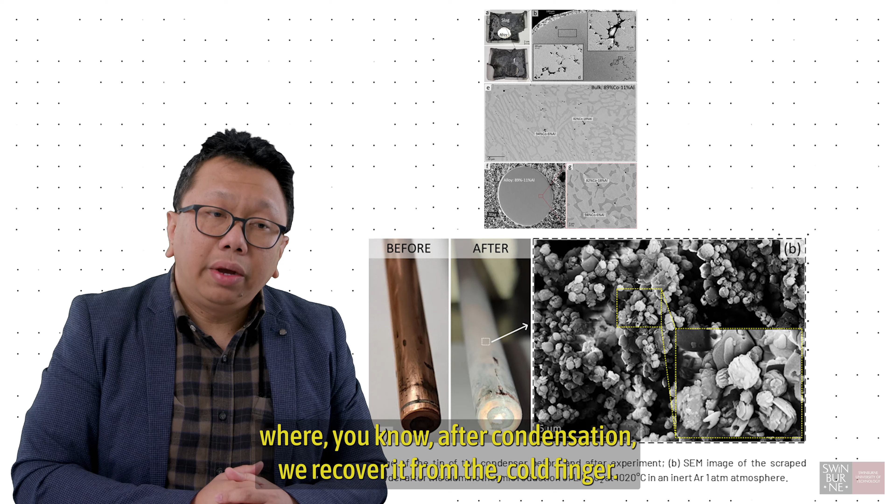As you can see, this is the metal that we produce: cobalt, aluminum alloy, as well as lithium in the gas phase, where, after condensation, we recover it from the cold finger.

My name is Reza Mukhlis. I'm a lecturer in mechanical and product design engineering. Now I'm working more on the recycling of metals, and also with the green process of metals, how to produce metal with minimum carbon footprint.

So related with the plasma things, we also try to produce silicon. Silicon is one of the critical minerals in Australia, and for that silicon we also use hydrogen. Usually silicon is produced through reduction by using carbon, so now we're trying by using hydrogen plasma.

And one of the sources of silicon that we use is rice hull. Australia produces around 100 million kilograms of rice annually, and 20% of it is hull, which is just disposed of, either as landfill, or maybe it's just used as a low value product, like bedding for animals.

So the thing is, with the rice hull, it has a quite high purity of silicon, because they have a selective intake from the plant. So then we use that rice hull to try to extract the silicon out of it.